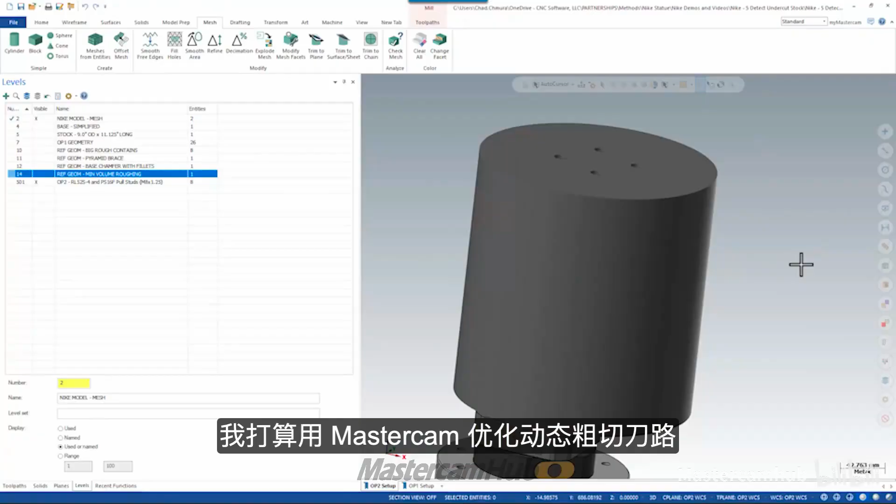We're now ready to rough the Nike part. We have all of our bracing and our reference geometry in place, so we're ready to apply some OptiRough toolpaths. So here we can see we're starting from a large piece of stock. We're running OptiRough toolpaths from the top plane and then from the right plane with this stock model resulting.

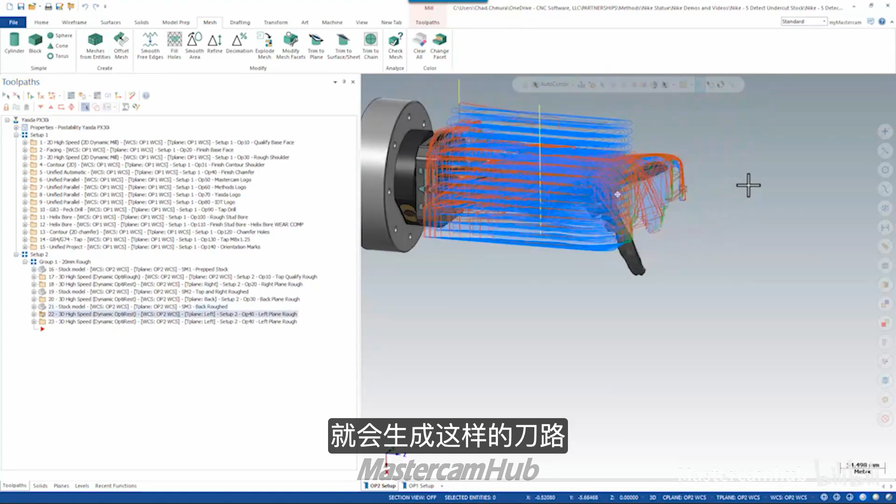We then come from the back with one more stock model, and we're left with this large corner of material we need to get rid of. By default, if I create an OptiRough toolpath in the left plane, this is the result. This looks perfectly sensible. It's a good OptiRough toolpath. We would certainly run it.

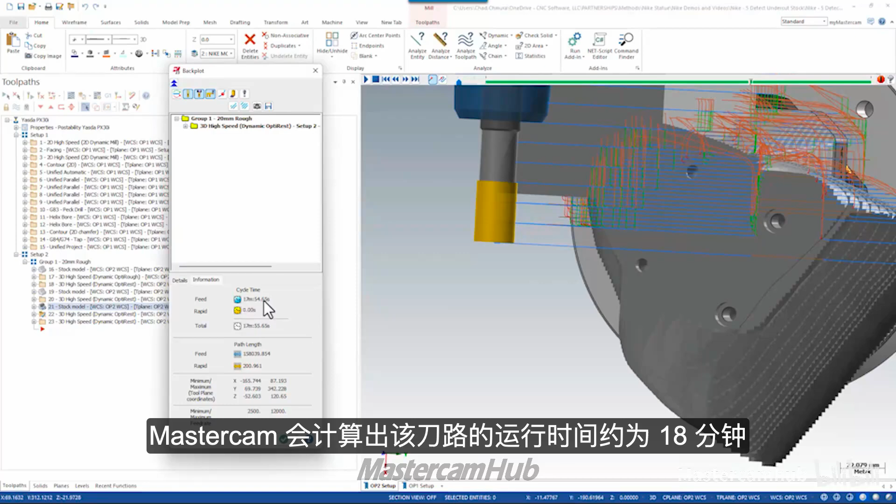However, if we turn on the stock model, we can see we have a series of air cuts. If I open Backplot, as the tool breaks through this bottom area of stock, there's really no reason to have all these extra step downs in open space. In fact, if we look at the length of this toolpath, Mastercam is estimating just about 18 minutes of cycle time for this one toolpath to run.

Now, Mastercam has some new tools that are really going to help clean up this toolpath, and it's as simple as checking one single box. Since this is a toolpath that is rest roughing, we are using a stock model to trim the roughing motion. By default, OptiRough doesn't know if there's an air gap underneath your stock model, and that's why we see that waterfall effect of the tool dropping down in open space.

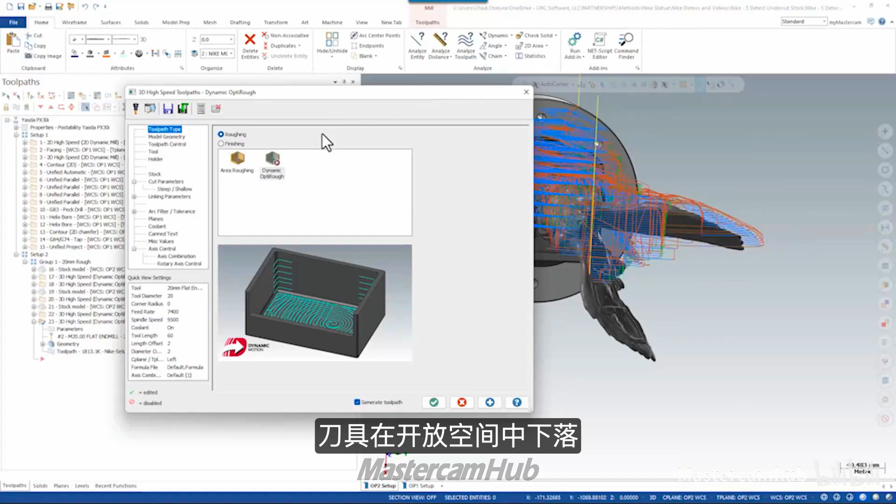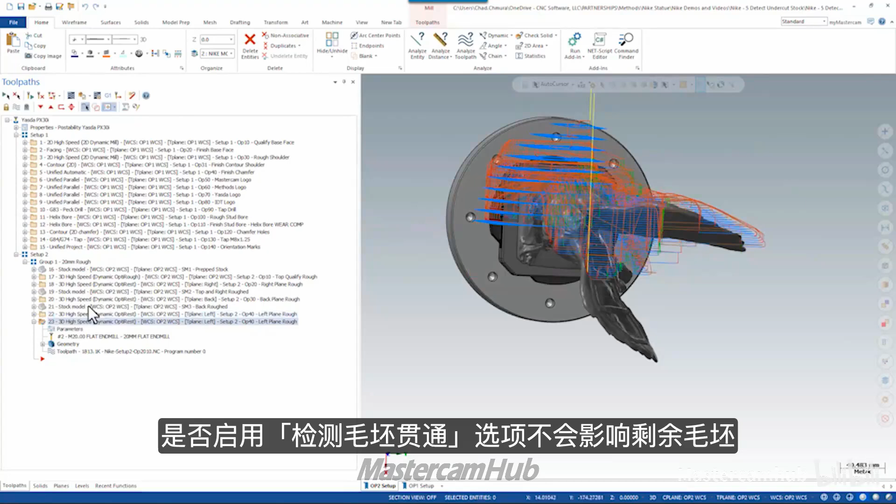In Mastercam 2023, we introduced the Detect Undercut Stock checkbox. Just by simply toggling that on in this case, we can trim all these air cuts below the stock on the front of the part and in the wing. The resulting stock of running this toolpath or the Detect Undercut Stock toolpath is going to be the exact same thing. Detect Undercut Stock breaks through and removes all the following air cuts.

If I open Backplot on this toolpath, let's check out the Backplot runtime. Mastercam's estimate is just over 12 minutes, so we go from 18 minutes down to 12 minutes at the machine just by toggling on one checkbox.

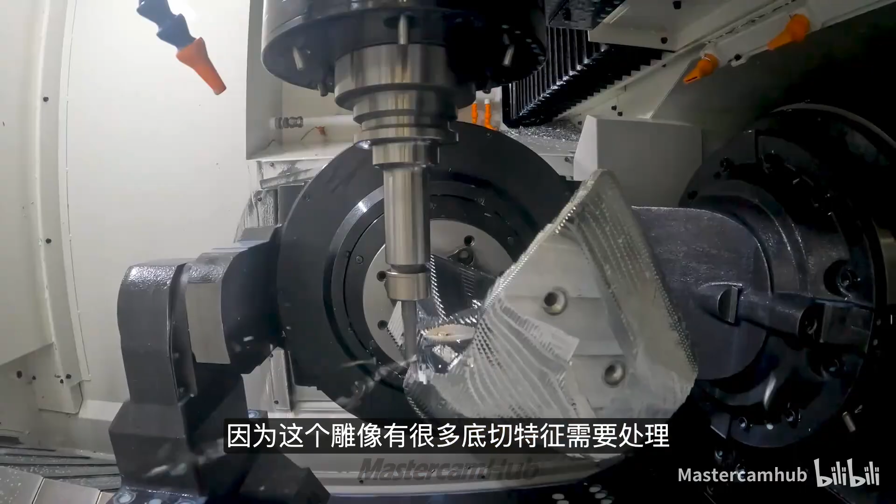This Detect Undercut Stock checkbox was invaluable on the Nike project because this part is full of hidden undercuts. However, I found that I didn't need to use that in every single case because sometimes the added regen time of Detect Undercut Stock didn't balance out how much time it did save. In the case of this toolpath, we're saving 33% of time at the machine, so I definitely want to use Detect Undercut Stock.